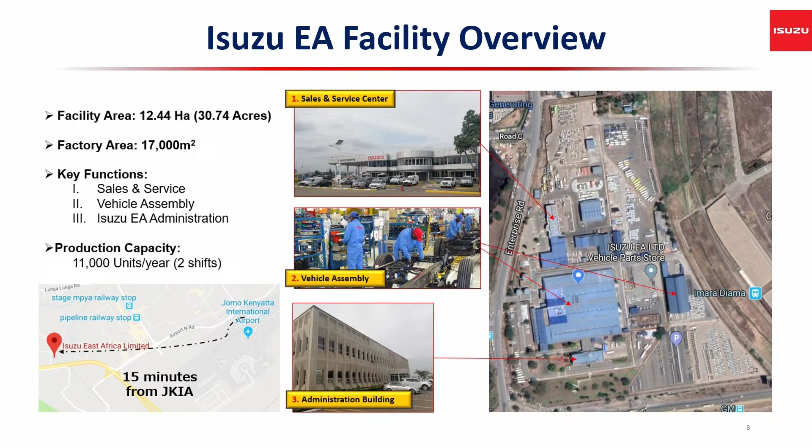It's important to note that the area where the assembly is done, this area where you can see primarily, it's a bonded warehouse. That means it's a KRA bonded warehouse. Every operation that is happening there is under control from KRA. That means because we are, by virtue of the business that we are doing, we are exempt from taxes. And I'm going to explain for you much more in the next slide.

So this is the CKD assembly breakdown levels. And this is now the primary business case behind which we are able to do our business. There's a legal notice number 84 of 2019, which now stipulates the level of breakdown that the government allows for assembly to take place here, so that to be able to benefit from tax exemptions.

Now, what you are seeing here, this is a CBU. CBU means it's a completely built vehicle. So when you import a vehicle complete as it is, it's subject to full taxes. It's subject to excise duty of 30%. It's subject to import duty of 25%, and also VAT of 16%, because when we do the value addition at Isuzu East Africa, there are some taxes you have to pay for value addition.

But now, when you come to CKD level 2, those are now what you normally see, these are the parts that are now coming in form of the crates from Japan. In CKD level 2, we have the cabin that is built. So the cabin comes itself. It has already been welded in Japan. The trim, the seats have already been put inside. So it just comes like that complete.

Then in terms of the frame assembly, all these parts, you remember what I told you about the 30,000 parts? These are all what comes to 30,000 parts together with this on the chassis and all over the vehicle plus the engine. So in CKD level 2, there is no body shop and there is no paint shop. So you just primarily come and put the cabin on the chassis and you drive off. You don't have so many people doing that work. It's not such a big operation.

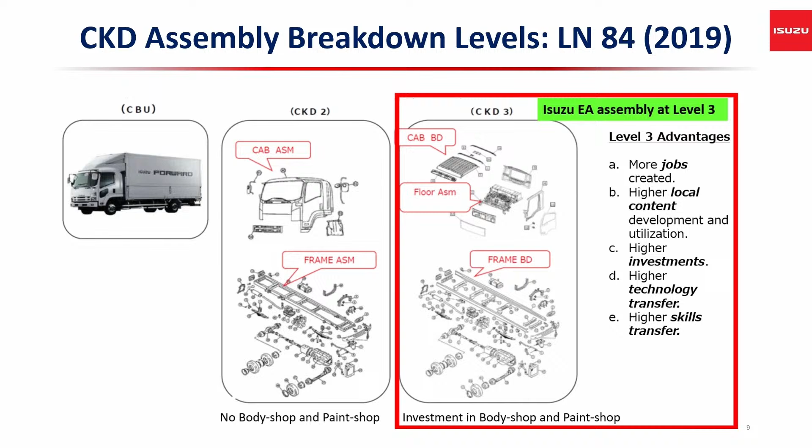Now that we're done with the introduction, I'll share a few key learning areas we've experienced in our journey as Isuzu East Africa. There are a lot of things, and we invite you to come visit us. Every day is a learning experience, every day we are discovering new ways of doing things, and that's the most exciting part of what we do. In terms of quality, we are learning, making mistakes, learning from those mistakes, learning fast, failing fast, and improving fast. That's how we've been able to grow.

We'll share a few learning areas aligned to implementing our quality management system. We'll look at the assembly process, talk a bit about quality management, our Isuzu manufacturing system, and our journey transitioning from General Motors to Isuzu. Then we'll talk about the customer experience and customer satisfaction, and also, like William said, the concept of a sustainable business.

This is a new area, and I'm happy that you're talking about ESG - environment, society, and governance. Yeah, so the ESG part of the business is also very important.

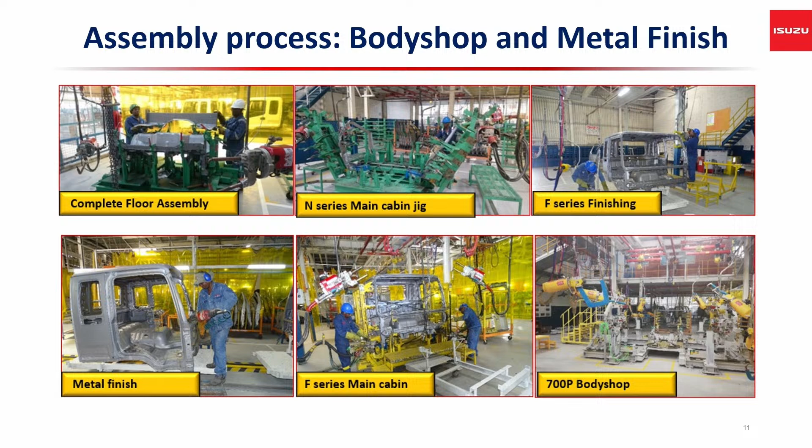This is the F series operation, and this is also an upgrade of the new model. You've been seeing the old model of Isuzu, then you see the new shape. When you change a model, you also change the body jigs. These are the jigs - you also change that.

Next you look at the paint shop. After you've assembled the body and done the welding, the next key operation is the paint operation. The paint operation has quite a number of steps, and recently we added an additional process called electrodeposition, which is a very high-tech process. There's a process before you even start the paint process - you have to give the steel structure body of a motor vehicle corrosion protection.

So there's a special paint called ED coating, and we launched it last year. The president came to open it, and there are only three such facilities here in Africa - one in South Africa, one in Kenya, and one in Egypt. This attests to the kind of high investments needed for us to be able to improve, and because of setting up that system, we are able to employ more people.

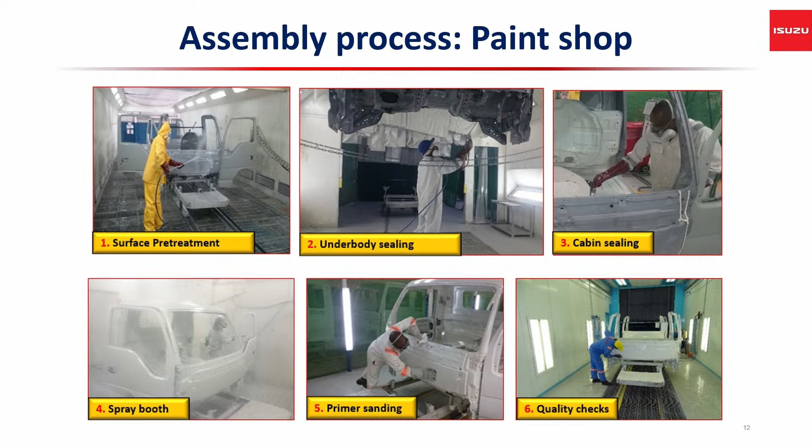So in the paint shop, surface pretreatment is done, cleaning to remove any dirt. Then it is sealed, because to prevent water coming into your car, this sealing has to be done. Failure to which, when you wade through water especially during floods, you can see water coming in. But when you wade through water you don't see any coming in, because that sealing has been done. Then you also do the sealing for the cabin, then it goes for the first spray. After it's sprayed, it's finished so you can have that good shiny finish on your vehicle. Thereafter you do quality checks.

After that happens, you go to the trim line. After the cabin has been sprayed and painted, you now come and put the seats, put the dashboard, put the cockpit - which is the dashboard - and put in all those small, tiny window winders and the windows. This is a highly labor-intensive process, and we employ quite a number of people to do this work.

You can see seats here. These seats are locally made by the local manufacturer, and they meet the same standards and quality as those made in Japan, because the criteria and requirements for local part manufacturing must meet the parts done in Japan.

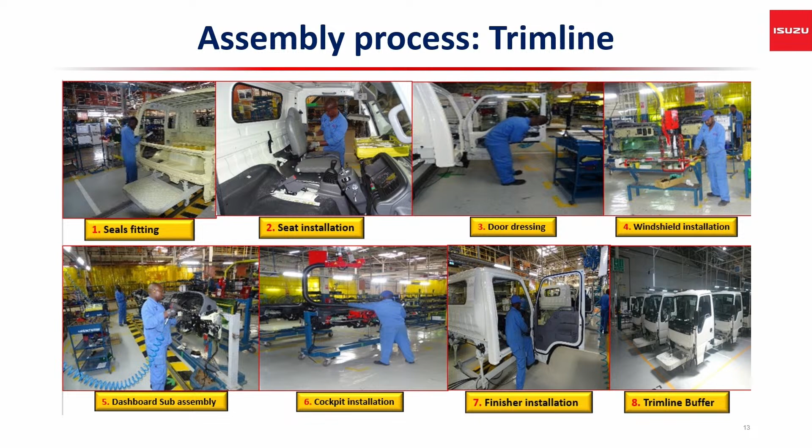Next is the chassis line. While the cabin is being built, on another line at the same time, you have the chassis, which is now the structure that carries the vehicle. We have the steel C-sections that come in from Japan, and we rivet them. This is now the value addition. You saw in my earlier presentation those small parts, the chassis has to be riveted, it has to be welded, and you can see now after it has been riveted and welded, the axles are now put on the chassis.

After the axles have been put in place, the cabin, which has now been completed from the other line, is mounted on the chassis. After that, quality checks are done to ensure that everything is in place before releasing it to the customer. So that is a summary of the assembly process.

When you go to the end of line operations, after the vehicle has been completely built, there are some tests that have to be done. One of the key tests, which we normally call the end of line operations, is to ensure that the vehicle is safe. A safe vehicle is a vehicle that can stop, so you have to test for the brakes. If the brakes fail, that vehicle will cause an accident and fatalities.

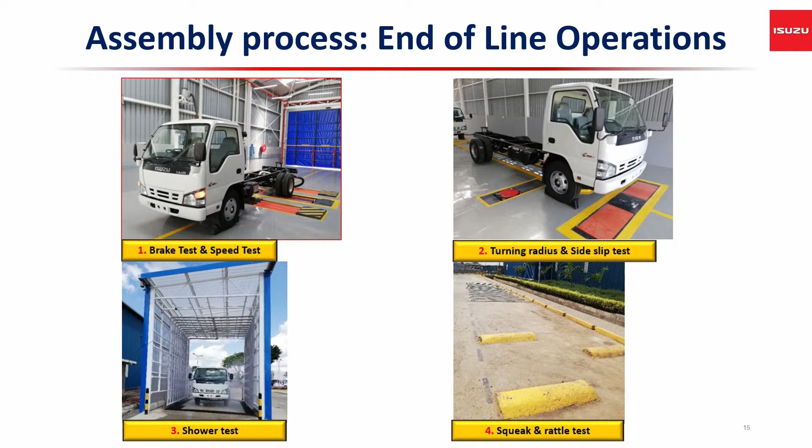For the DMAX we are also looking at opportunities. Hopefully in future we'll now also produce in greater detail, like we are doing for the trucks.

Next we will look into quality management. This shows our journey in terms of quality management and implementation of ISO standards. I must say this has been the best decision we've ever made as a company—to pursue ISO certification—because it immediately changed our entire operations. It changed the way we document our processes and the way we view our customers, because for the first time we were made aware of customer expectations, customer requirements, and how best to meet them.

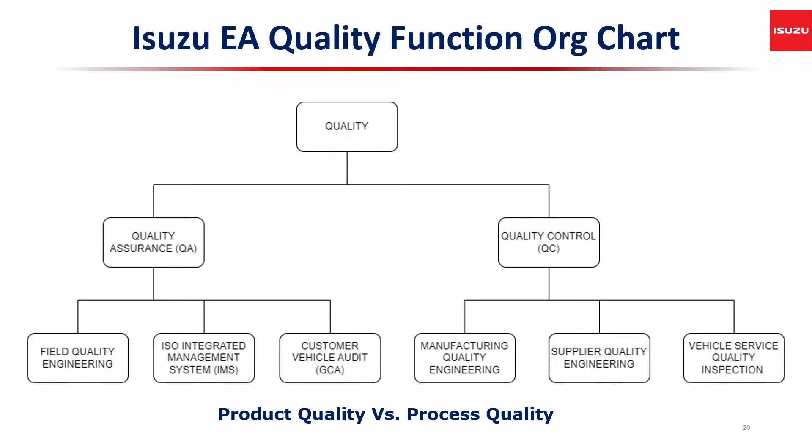Next, some of the areas that we improved. I'll talk a little bit about communication. Lack of effective communication was a big problem at Isuzu East Africa, because being a very fast-paced assembly plant and organization, we were producing close to 30, 35 vehicles a day. There are so many assembly operations happening.

And when problems happen, the following day there would be issues at the beginning of the day, and no one knows exactly if there was a defect or a problem in the line, who was involved. It's because the managers were asking the supervisors, and the supervisors were not aware because they were not communicating with their team members.

So the solution we came to was to have what we call a quality audit meeting. When you come to Isuzu, there's a location at the entry of our assembly plant, and you see it involves all members who are part of the manufacturing process, from engineering, manufacturing, quality, safety, and maintenance, and we all stand around here every morning between 8 and 8:15.

It's a standing meeting for us to look at the previous day's performance and to plan ahead for the day's activities. So if there was any issue, or if anyone had a problem the previous day, they can report it and get the support they need.

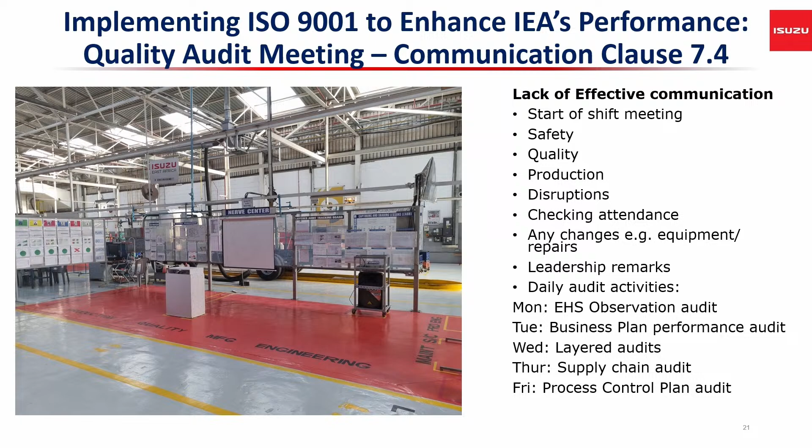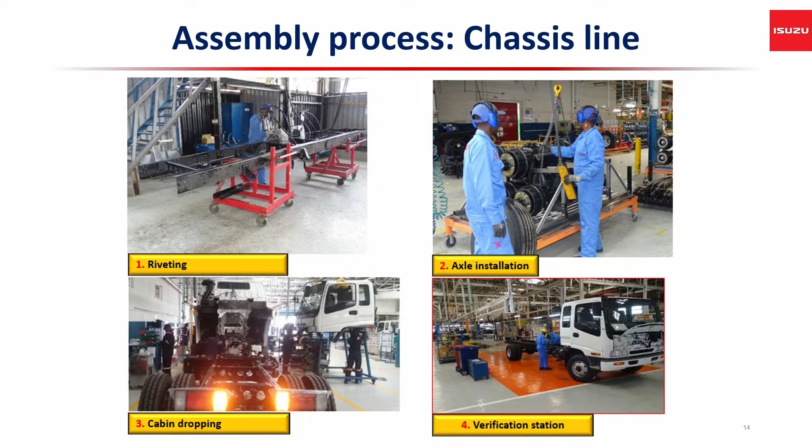Thank you for that. Okay, sorry about that. Maybe the next one. Yeah, so let's be there.

In terms of procedures, we've talked about this previously. Implementing ISO assisted us to incorporate our internal controls procedures, which were being handled separately, with the work instructions and documents. The key learning was that when implementing quality, especially in line with ISO principles, you cannot have two sets of processes. You cannot have an ISO process and a separate day-to-day process. It's important that both processes be one, so that quality is integrated into your processes. That was a key learning.

That has helped us a great deal to ensure that we don't have duplication and multiple systems that aren't working. Then a key issue of risk management is our business continuity planning. We realized that to be effective as an organization and maintain quality, we must address risks that can hamper or deter our process of performing operations.

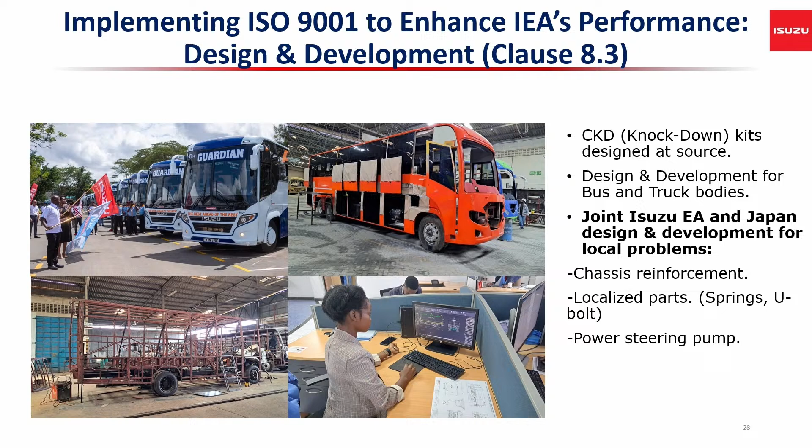So that's also an area of learning that we realized we have to come up with procedures that will support local development for some local parts to support our bodybuilders.

Then also, another challenge that we had was metrics visibility. When we were having objectives being set, no one was aware about who is doing what, which team has achieved what goal in the process. So we came up with a board where now all these metrics became visible, at the entry of the plant, such that everyone working at Isuzu, when they enter, can see what the performance is in terms of quality, people attendance, safety, and environmental performance.

We've gone even further to improve this system, where you can see it on an automated dashboard, an electronic board, so that everyone, even as they work in the course of the day, can know at lunchtime how many vehicles have we made against target, what is the defects captured to date against our target, how many safety or injuries have happened, how many environmental incidents have happened, and most importantly, what is the cost, because the cost of production is what maintains our competitiveness. We have to manufacture at below a certain cost for every vehicle in order for us to be profitable.

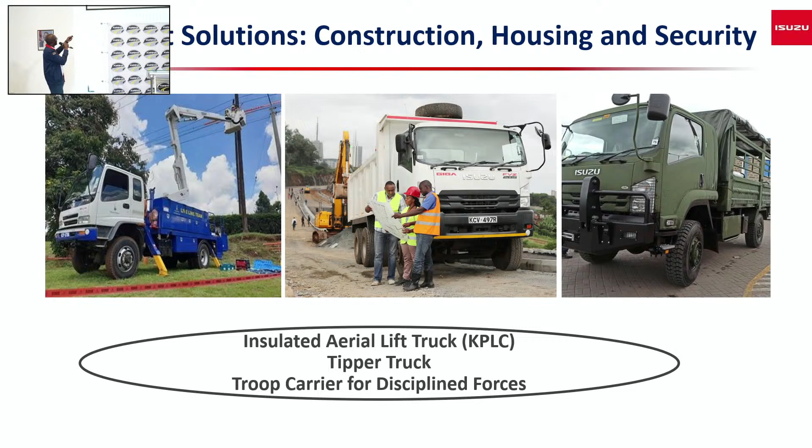In terms of our channel, I've talked about the service points and the parts. We give genuine parts which also have warranty. The problem is when you buy a vehicle, you assume if you go elsewhere, you're told a filter is this price. When you come to Isuzu, you think a genuine filter is this price - it's a bit expensive. But because you cannot cut it into two and see how genuine it is...

Your vehicle is told it should be serviced after 10,000 kilometers. Put a filter - one is fake, one is genuine. After 6,000-7,000 kilometers, your vehicle has issues. So the only way to get a genuine part is to go to an Isuzu service outlet.

We've talked about vehicle engineers on ground and training. Other than that, as Calvin said, we are very cognizant of the environment we work within.

And on CSR, we make sure we do projects to give back to the community. We've got 3 pillars. One is road safety. We work a lot with NTSA.

We've got a health center in Naivasha constructed by Isuzu, because we thought that was one of the highways that has got a lot of accidents. We've done a lot of communication, advertisements, and safety updates through NTSA and ourselves.